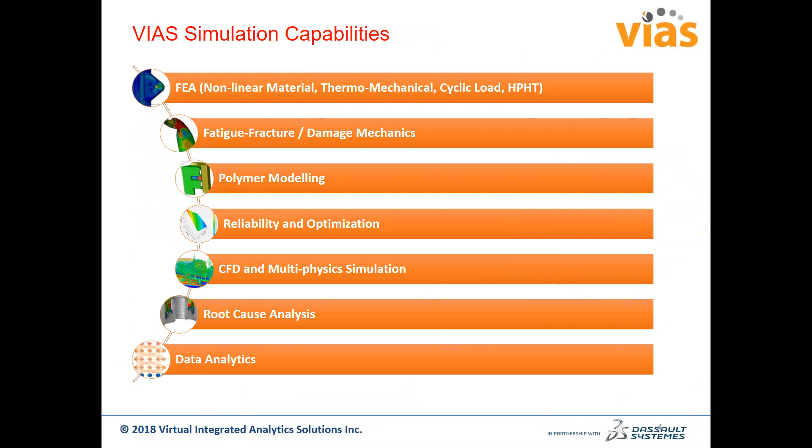Just to put into perspective a brief history and the current status of AM simulation. It's basically a process of joining materials, and I guess we can say it has been inspired by what is out there in nature. I worked on some functionally graded material during my PhD, and it was a bio-inspired material because, based on the loading requirement, we actually make a lattice structure. Our bone is basically a lattice structure which takes the load in the most efficient manner.

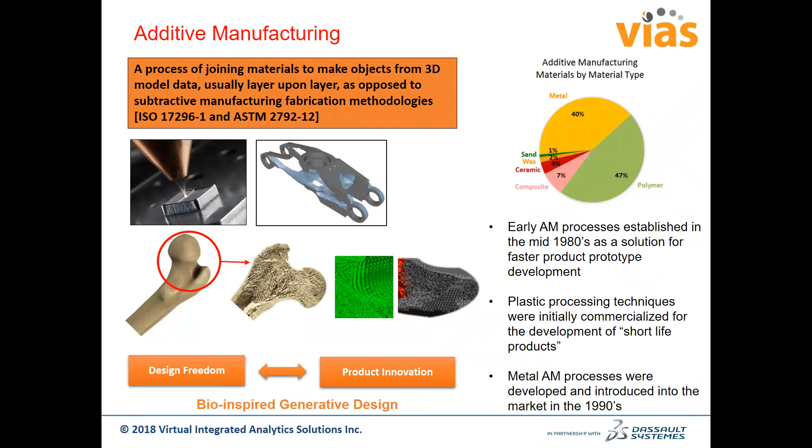Earlier, optimization was more limited by how you can manufacture it, but with additive manufacturing it's opening up to your imagination, and you can maximize your optimization algorithm to achieve a target performance. That's where additive manufacturing is coming in as a big change; it's called a disruptive technology as well. So we are looking forward to a great future with this manufacturing technique.

I'll quickly go through additive versus subtractive manufacturing. One thing is the material, so we can reduce material waste, and another is that with additive manufacturing, as I mentioned, it's about what you can optimize and how you can optimize your structure. That is becoming boundless right now.

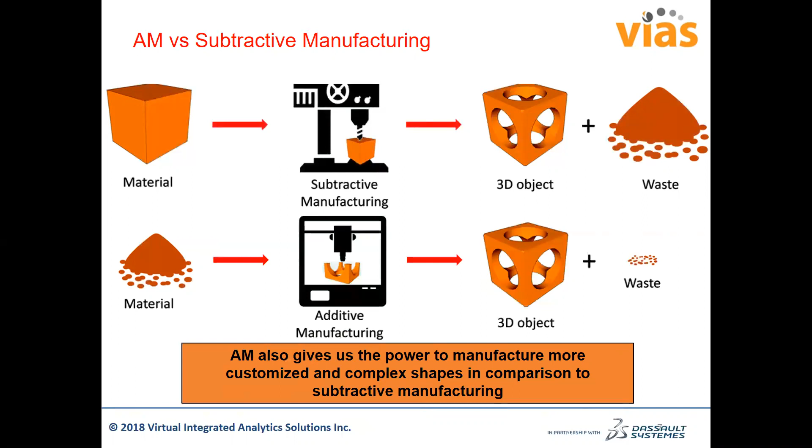Of course, there are certain challenges, and simulation is there to help you, because if we can bring the physics inside your simulation model, then one can avoid doing a lot of tests and a lot of builds with trial and error. And Dassault has a very good solution for that, which will be the topic of today's webinar; the technical part will start soon.

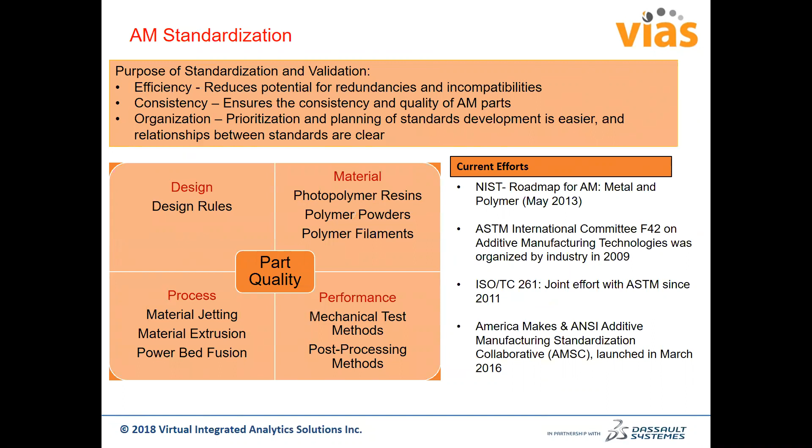There's a lot of standardization effort going on, and like any other industry, eventually there has to be strict standardization, but the Dassault Systèmes software is being developed as a more physics-based solution, and it keeps in touch with all the standardization efforts. So whatever requirements come through the standardization effort, you should be able to see them reflected in the software capabilities.

Also, one of the biggest tasks for additive manufacturing is verification and validation. Nothing in simulation can be used with fidelity without the verification and validation part. So there is a lot of verification and validation effort going on to make this software a robust and high fidelity solution. So if you have any reliability or verification and validation questions about the software, we'll be more than happy to have a conversation with you.

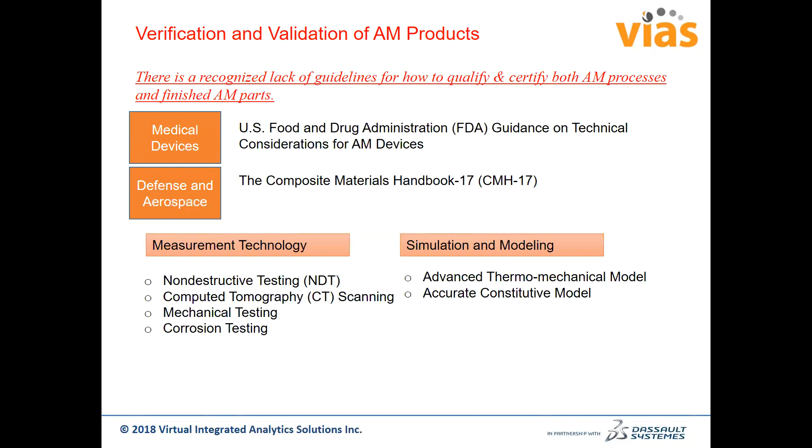Having said that, I will request Rachel to start her part of the presentation. Thank you. Okay, thank you. Can everybody hear me? Yes, we can hear you, Rachel. Okay, and you can see my screen? Yes. Okay, perfect. Thank you for the introduction.

So my name is Rachel Fu, and I work with Dassault Systèmes with the Simulia brand, so a lot of our simulation type of tools. So today I'm going to go over the Dassault Systèmes end-to-end capabilities for covering additive manufacturing. And then, as was mentioned earlier, we'll have a Q&A session at the end, so definitely bring your questions.

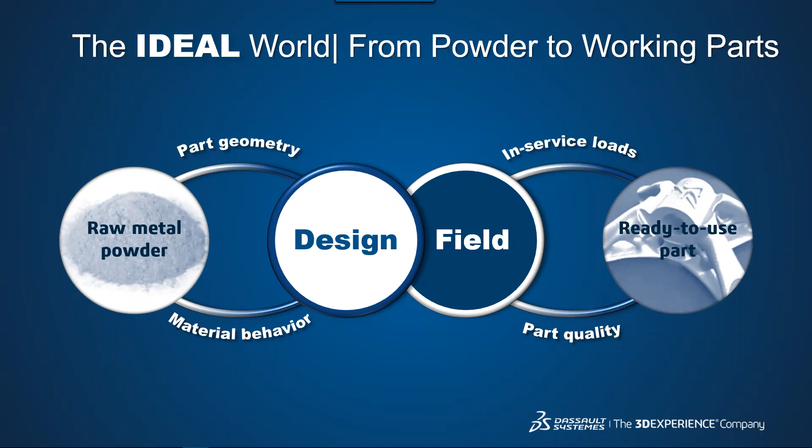Okay, so if we look at an ideal world, we typically look at the process of going from a raw metal powder to a ready-to-use part separately, and we designate challenges either to design or to how the part is actually going to perform in service. So design for additive is largely looking at things like generative design tools, topology optimization, geometry reconstruction, and functional lattices. And then on the performance side, usually the challenges are more related to accurately capturing loading and assessing things like, is there going to be crack initiation? Is the part going to withstand its fatigue life?

But when you start looking at additively manufactured parts, the additive manufacturing process introduces a lot of factors that now need to be considered when moving from your as-designed part to your as-manufactured part. So things like the support structures in your build and the tool path that you're using can largely affect your resulting part distortions, your residual stresses, your surface finish, and the as-built properties of your manufactured part.

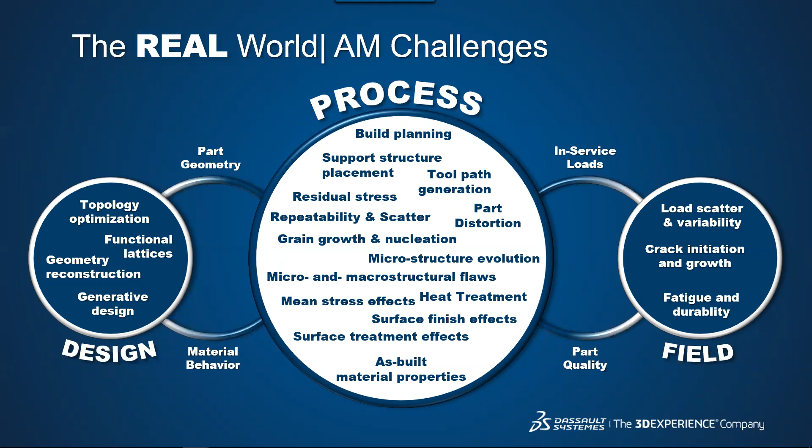So part of understanding the material properties is really looking at the microstructure evolution, grain growth, and nucleation during the build process. So we really want to use software here to help us understand this process gap between our designed part and our manufactured part. So we really need to connect all of these components.

Okay, so the current landscape of software tools for additive manufacturing is really disjointed. The designer, the manufacturing engineer, and the analyst are all working on their own files, each with their own specialized software tools. And so the challenge has become managing all the data and translating this data between all these different software tools.

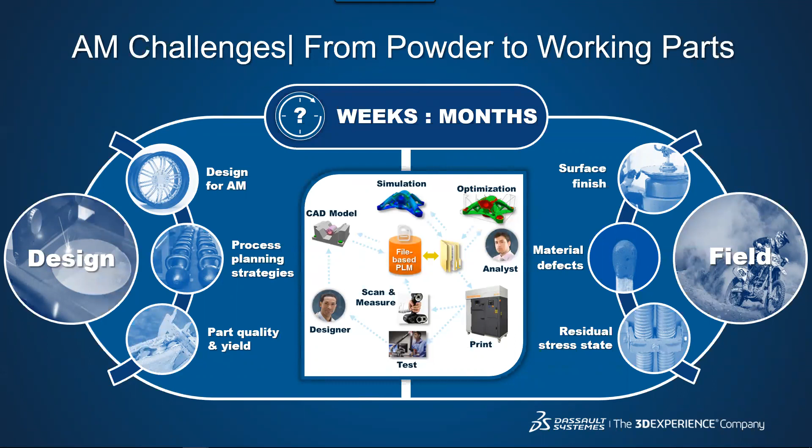So the result of this disjointed environment is that it can take weeks or months to go from a design to a successful functional part. So we're trying to think, how can we get this down more to the scale of days to weeks? So instead of taking months to come up with a design and have it be a functional build, how can we do this on the order of days or weeks?

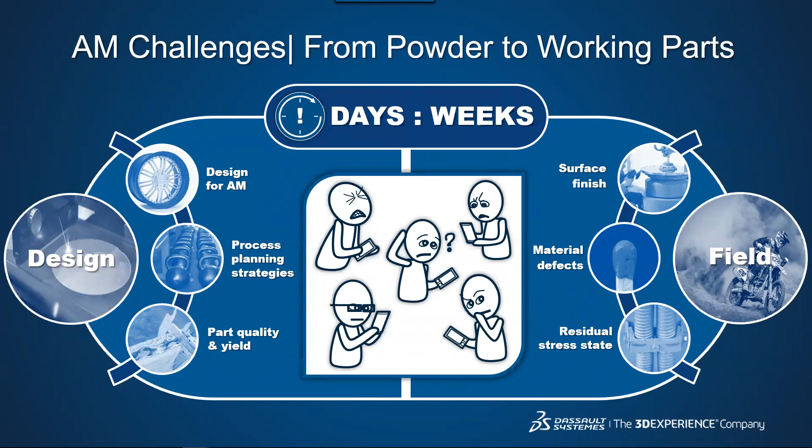So with Dassault Systèmes, the next evolution of our software capabilities is all encompassed within this 3DEXPERIENCE platform. The idea is that Dassault has lots of different technologies available: powerful CAD technologies, manufacturing technologies, simulation technologies. Can we bring this all to the same platform so that it can all use the same data, so that there is none of this time spent in translation?

And so clearly for additive manufacturing, where one of the main issues is a disjointed landscape for software, the 3D Experience platform is going to be a solution that is going to help address some of these AM challenges. So the 3D Experience platform is really data driven.

So again, all of the different capabilities within the platform are sharing the same kind of data set, but it's still model based. So your finite element analyst is still working on a model that is the same representation of data as the CAD designer, but everybody does have their own specific model. So it's not too much of a paradigm shift; engineers will still understand the way these different models or these different roles work.

What it really allows you to do is just stay connected with all of the different engineering functions on the same set of data to help you connect what's happening in the real world versus what you're virtually simulating or developing.

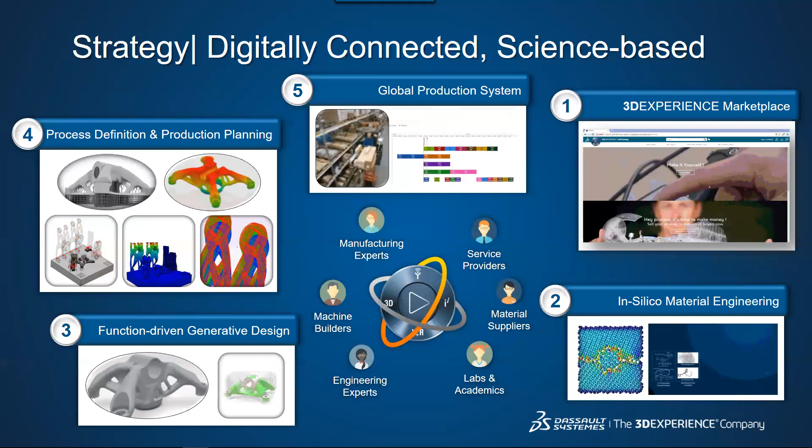The fourth bucket is process definition and production planning, and we will talk about this in detail in this webinar as well. So this bucket encompasses setting up your manufacturing build, sending it to a printer, and then also using that information to do build process simulations, which is going to help you figure out if that build is going to be successful, so that you can digitally work all of that out before you actually send any information to a printer.

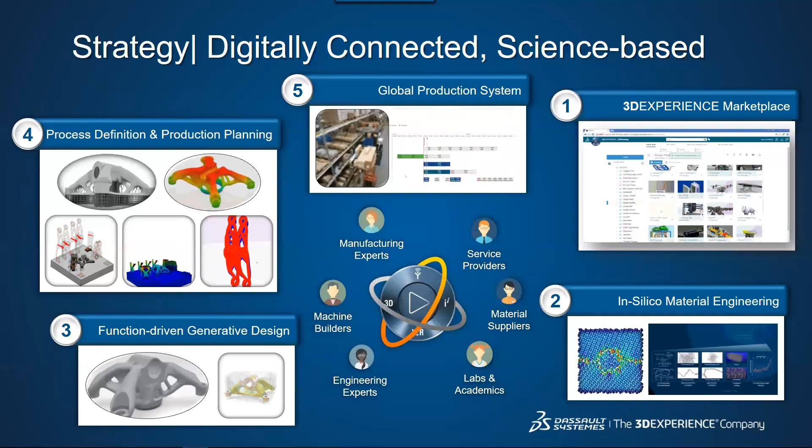And then this fifth bucket is global production system. And so Dassault has capabilities for manufacturing and monitoring your manufacturing floor. So these tools will help you make sure your additive manufacturing machines are all running optimally, you have enough materials, things like that. Just basically being able to manage your production system.

Okay, so the first role or application I want to look at is this functional generative designer role. So the tools in this application are really changing the paradigm from simply checking if your design meets requirements to using optimization tools to actually find the design that best meets the requirements. And now with advances in additive manufacturing, we can actually build these optimized organic designs.

So the main advantage of this tool is really the combination of a robust optimization solver coupled with powerful but really easy to use geometry reconstruction tools. So there's a simple workflow assistant that guides the user through setting up the design space, loading conditions, and then your optimization targets and constraints.

And then after your optimization is performed, you can explore the optimized design space. And then with a simple button click, you can actually generate CAD geometry from your optimized mesh. And then you can do your validation study on this geometry.

So the other capability that this tool has is that different manufacturing constraints can be applied to the optimization. So we see here there are milling and casting constraints, versus say additive, where maybe you don't have any manufacturing constraints. So these different manufacturing constraints, along with this variants creation tool that we have also in this application, really help you choose the best concept based on whatever your specific business key performance indicators are.

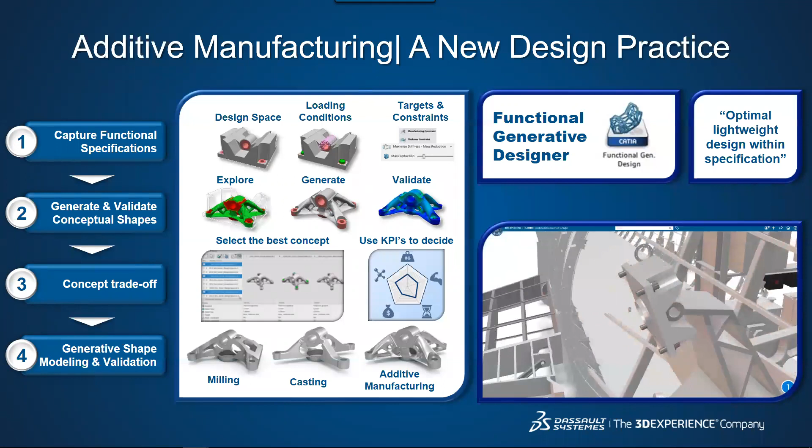So when you've gone through these exercises of these different optimizations, you've used the variants tools to decide on what your final concept is, then you can use our geometry reconstruction tools to reconstruct high quality shapes, and that really leverages the whole power of the CATIA modeling that we have within the 3D Experience platform.

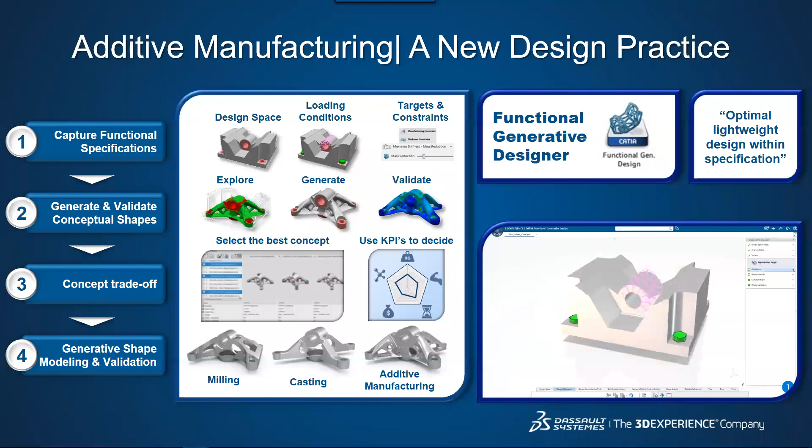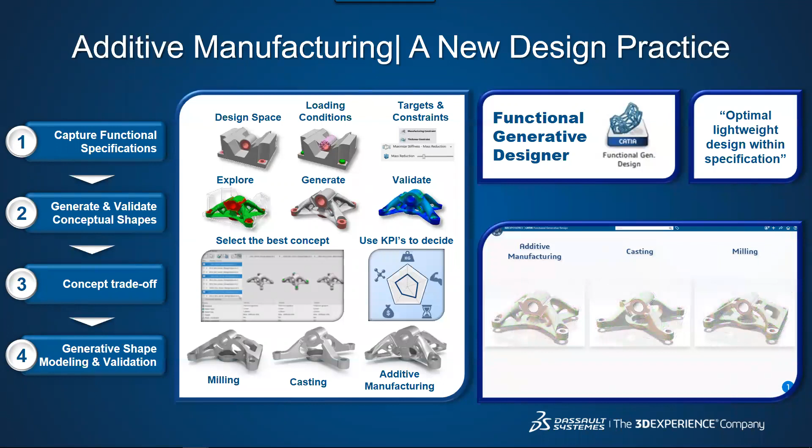So when we talk to designers and manufacturing engineers who are looking at design for AM, we've really observed that the main pain point for generating this topology optimized geometry for additive is connecting those optimized simulation results with a CAD geometry reconstruction. And so that is the process that can be handed off between a designer and a simulation expert, which can take months of work. But this role really integrates that all into the same solution, so it can really save a lot of time in that space.

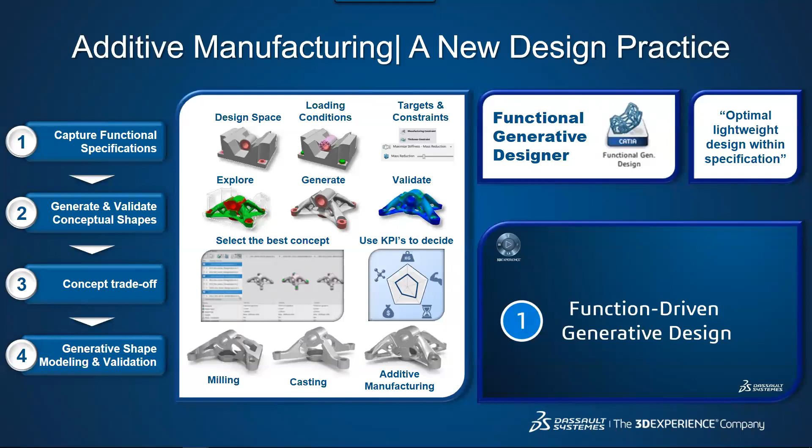So we've seen how the interface looks, and it's a very intuitive designer-based interface to allow designers to have access to these simulation tools. But if we look at the technology behind these tools, we can see that it's based on our established Tosca and Abaqus solver technologies.

So topology optimization gets increasingly more complex as you add nonlinearities in the model. So Tosca, which is a very advanced topology optimization tool, really can cover all of these complexities up to large relative motions, including friction. So currently our functional generative design tools include optimization with linearized contact, but our roadmap is to ultimately include all of these levels of complexity.

So we've also recently introduced geometry-based overhang constraints, and this is specifically for additive. So this means you can define your build direction, and it will include that in the optimization so that it can generate an optimized shape that is self-supporting or minimizes the amount of support structures required.

So this final box here on the right is showing the different levels of geometry reconstruction techniques that are available. I mentioned earlier that there's a one-button click reconstruction tool, and that's this smooth surface method shown here. Direct modeling lets you draw rough tubular shapes on a surface and then merge those tubes and also use dedicated drawing stripes. Or you can actually build in parametrized shapes, so you can dimension different regions of the model. So you have lots of different flexibilities in how you're doing your geometry reconstruction.

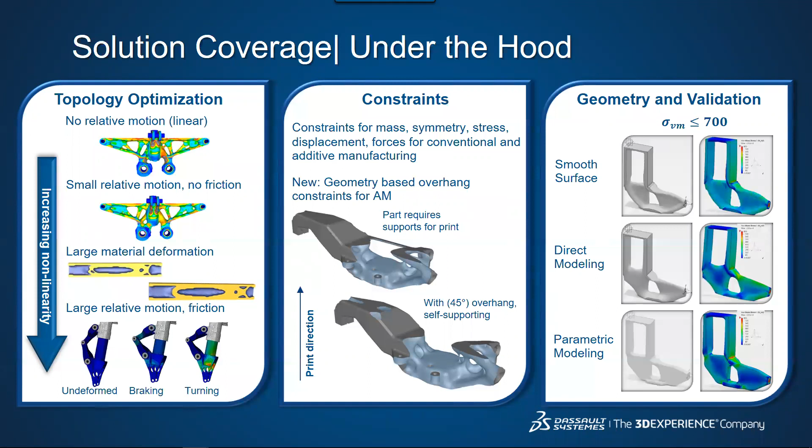Okay, the next role I want to introduce you to is where we plan for the additive manufacturing build. So currently we support out-of-the-box powder bed fusion process, and we have plans to expand to other AM processes, which I'll talk about in a future slide. So the first step here is what we call capturing the manufacturing environment with process reuse. And what this really means is that we can have a set of parameters that are specific to a given printer and material set, and then we ensure that these optimized parameters are consistently used across an organization.

The next step in here is process preparation, and this includes orienting the part properly on the build tray, generating support structures, and then nesting all of the parts that are going to be included in the build. So for part orientation, we have some geometric optimization tools, so you can do things like minimize supported area or minimize support structure volume. We can generate wire, tree, or volumetric support structures. And one important thing to note here is that these support structures are geometry-based, and this is unique in this space. So these support structure geometries can be used upstream for design modifications, but they can also be used downstream for process simulations.

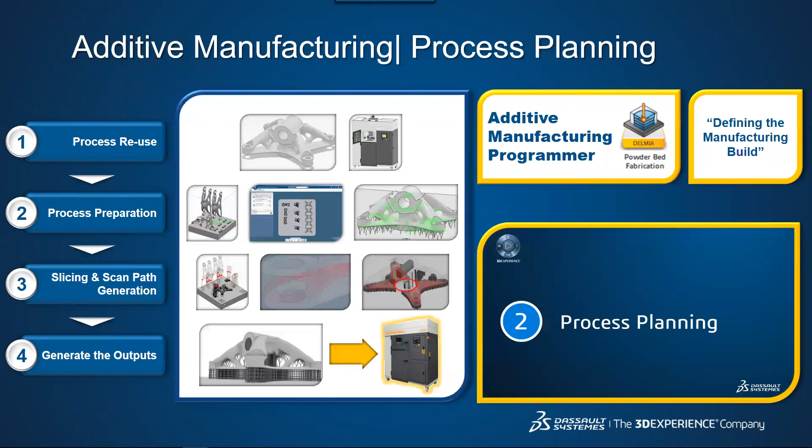So the nesting of the parts on the build tray we can do automatically according to some given rules or specified parameters. And then once all of your parts have been nested, the next step is to move to the slicing and scan paths. And those are generated based on process parameters, so things like laser power, hatch angle, scan speeds. And then once those tool paths have been generated, they can either be directly sent to the printer via some virtual machine APIs or neutral file formats, or we can use them as inputs for process simulation. And so this is the next piece that we'll see.

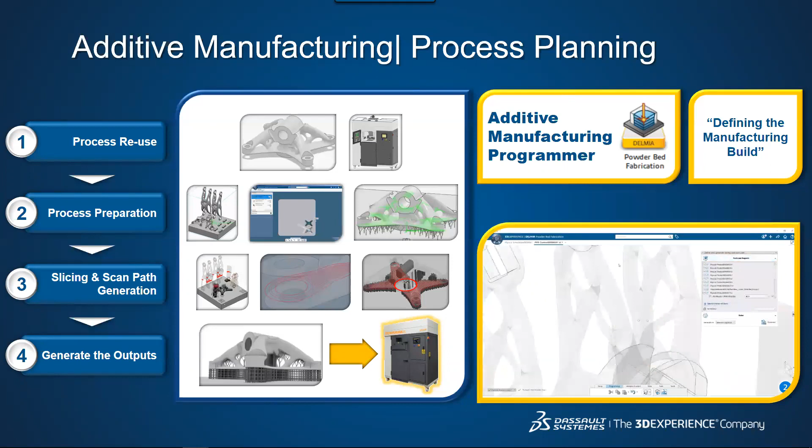Okay, so now we come to the additive manufacturing researcher role, and this is really where we're doing the process simulation or the virtual printing. And here we're really using the data from the other two applications that we've discussed to do these process simulations. So again, this is already all built on the build setup that you generated in the previous application. So we're going to focus more in depth on this application for the remainder of this webinar.

So within our process simulation application, we have a guided user interface for the powder bed process again. And this assistant really walks you through the steps required to build a process simulation model. So because we're finding designers and manufacturing engineers are also interested in additive process simulation results, we really created this guided interface to contain the simulation best practices so that it's practical for non-simulation experts as well.

So it's a simple to use interface, but underneath this graphical user interface is really a powerful general purpose simulation framework. And this has been developed on our established Abaqus solver technology. So the framework really allows us to perform multiple levels of simulation within the tool.

And we'll look at some details of that in the next slide, but really we're able to look at detailed process level simulations, so looking at things like microstructure, or we can look at what's more typically done, so part level simulations where you're looking at distortions and residual stresses for a given build part. But we can also look at build level simulations, so if you want to look at all the parts in the build tray and see if there are any thermal interactions that are occurring, we can do all three levels of simulation within the same framework.

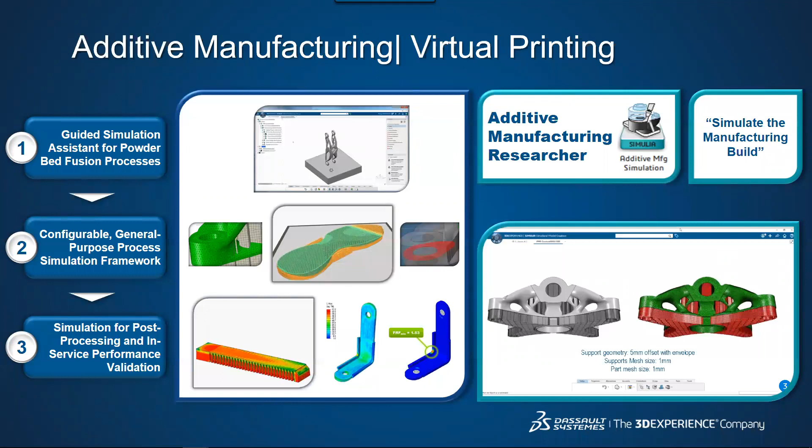Okay, so let's first take a look at this AM simulation framework. So we've developed some new technology for the solver to be able to handle these additive manufacturing type simulations. And one of the key tools in here is the mesh intersection module. So this is one of the main and very powerful features of the framework. So what this module does is it allows us to take process toolpath data. So that data is in the form of time, XYZ, and whatever specific data set, say laser power. And it intersects this process data with any arbitrary mesh.

So this means that we can use design as a starting point for simulation in that we can directly mesh our CAD geometry, and we do not need to use voxel approaches. And this is true regardless of how complex the part is. So the solver is going to handle sweeping through the finite element mesh with the toolpath and figuring out how to intersect that toolpath with the mesh to accurately represent the physics of the build.

So this process data can be directly obtained from print machines. So this could be at exact machine detail levels, and so that's, you know, millions of events, or you could use a more lumped representation if you'd like. So really, the user has control over the detail required in that toolpath data.

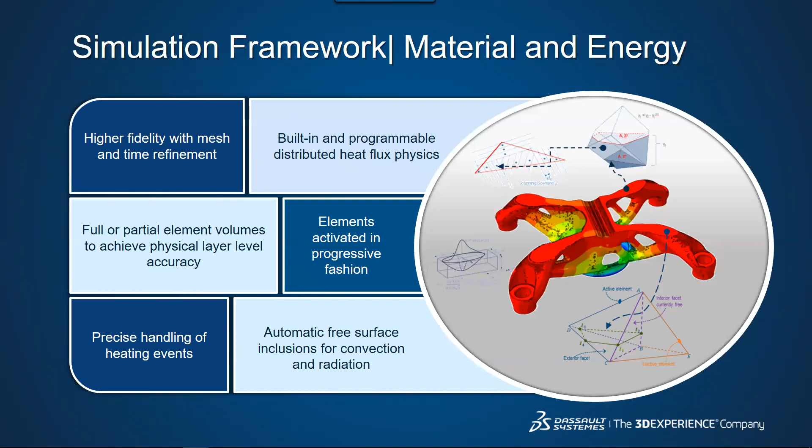Okay, so how do we do these process simulations? We perform the process simulations by doing sequential thermal stress analysis. So in the heat transfer analysis, the real scan data, or the real laser path data, is used to calculate the heat flux, including the detailed temperature dependent material properties and the build environment. So we have the build tray and the ambient conditions also accounted for. And this gives us our resulting high accuracy thermal profiles for the build.

We then use these thermal profiles to drive the stress analysis, and this is what is used to compute structural deformations and stresses. So that's the idea of how the overall simulation workflow looks. Let's look now at the value that these process simulations can provide.

So working with different customers, we found that recoater interference is an issue, and this occurs when distortions cause the build part to rise up out of the powder bed. This interference can cause defects, porosity, or it can completely kill the build. So to examine recoater interference, we can either monitor the distortions during the build on the current recoater plane and check that these values are within a given tolerance, which is what's shown in this animation here. We can also monitor those distortions during the simulation, and then terminate the simulation once a failure tolerance is reached.

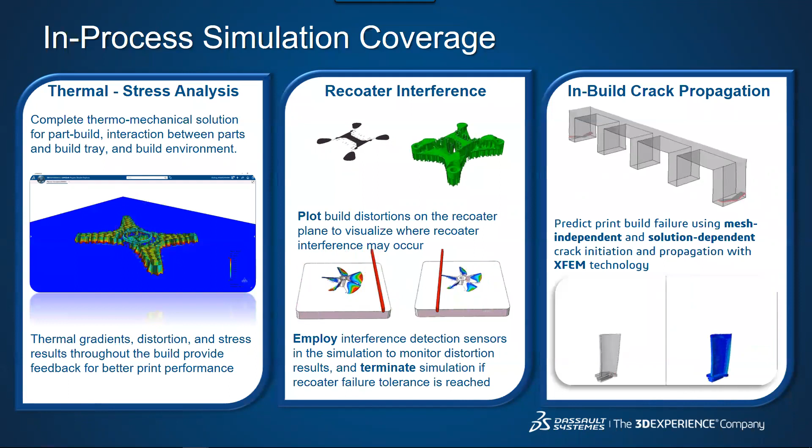So we've characterized the levels of solution fidelity as design through production to analysis, where design is a fast solution, which is just required in aiding design decisions, whereas analysis is a refined type of simulation where we have one build layer per time increment.

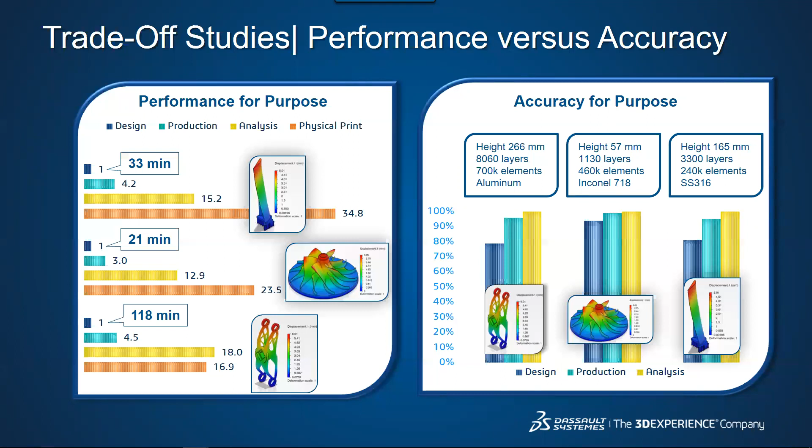Okay, so after the additive manufacturing build simulation, often you also need to simulate the additional post-processing that's done to the part. So it's not just built in its life cycle, it's going to go through a lot of post-processing treatments as well. So typically, wire EDM is going to be used to remove the part from the build plate. And then there's also going to be heat treatment cycles or any other final NC machining type processes.

So we can use progressive element removal to simulate wire EDM. And then we can also apply heat treatment thermal cycling to simulate that reduction of build stresses. And then we can include the distortions of the final build part in our NC machining code, and this can help you with fixture design and your NC machining programming.

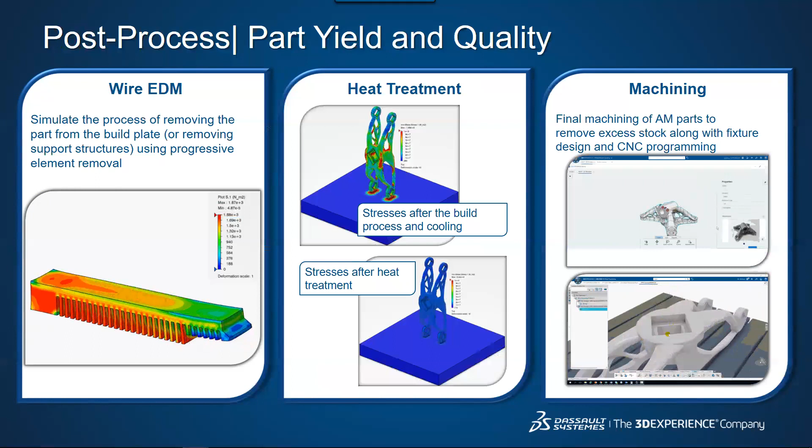Okay, so I mentioned earlier that one of the strengths of our solution is that the process simulations are built upon our comprehensive nonlinear finite element solver. So as a result of that, we are also able to do in-service loading of the additively manufactured part, because we can import the residual stress effects from the manufacturing history into our service loading simulation. So part failure and part durability are largely affected by these residual stresses from the manufacturing. So the ability to incorporate them into our subsequent in-service loading type simulations is really important.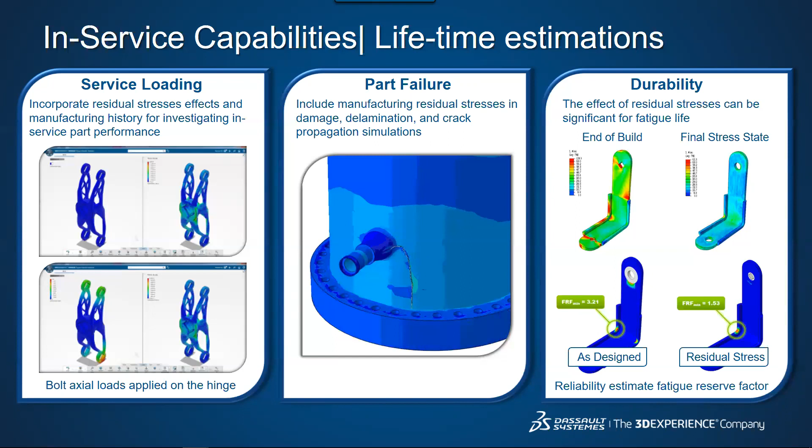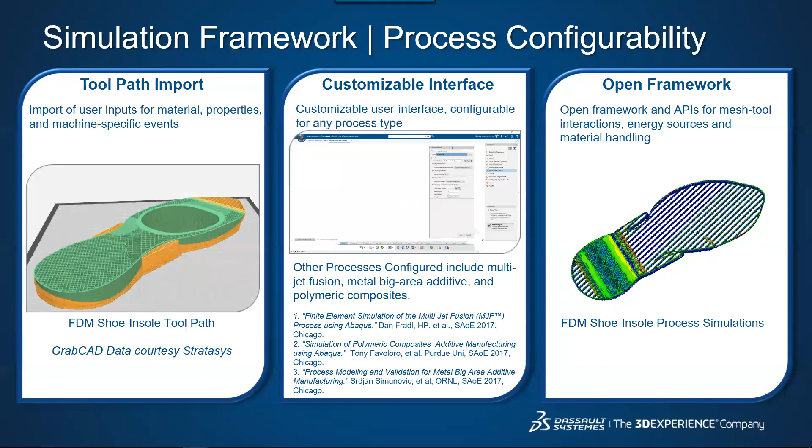Okay, so although our out-of-the-box tools currently support powder bed fusion, the simulation framework is highly configurable. So we've been able to use the same framework for different types of additive processes, things like FDM, multi-jet fusion, or big area additive manufacturing, which is some work we've done with Oak Ridge.

Okay, so far we've reviewed 3 roles in our additive manufacturing solution. We've looked at functional generative design, manufacturing planning, and process simulations. So the final role I want to show you is the reverse shape optimizer, and this is used for shape compensation. So this is an established technology, but we're finding that the capabilities are providing a lot of value, specifically in the AM space. So effectively, all this tool does is allow us to morph a CAD object by using point cloud data.

So there's a couple of different ways we can use this. We have our process simulation distortion results, so we can morph our original CAD object based on those process simulation distortion results. And that gives us a CAD representation of the predicted final build part. So we can do deviation analysis to compare this with experimentally obtained measurements. The other more interesting way we can use this tool is by negatively compensating the CAD part. So, we have these predicted build distortions.

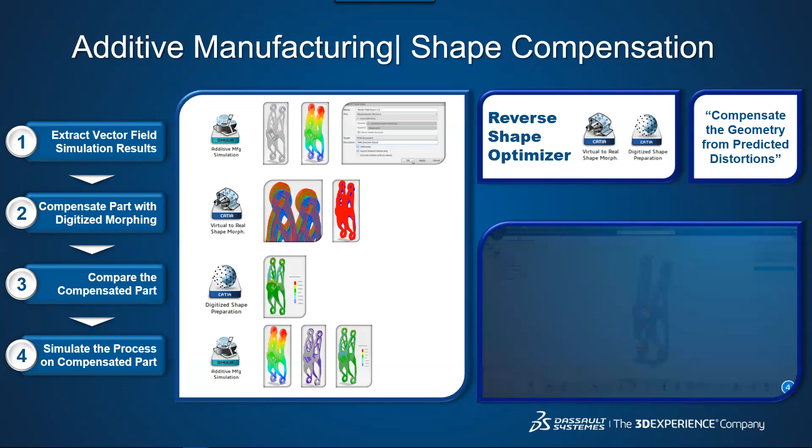We can compensate the CAD part based on a negative scaling of those distortions. So then when you actually build that negatively compensated part, as it distorts during the build, it actually gets closer to your as-designed geometry instead of further away. Because this is a nonlinear process, you may have to do this iteration loop a couple of times, but we have this set of tools that allows you to do that.

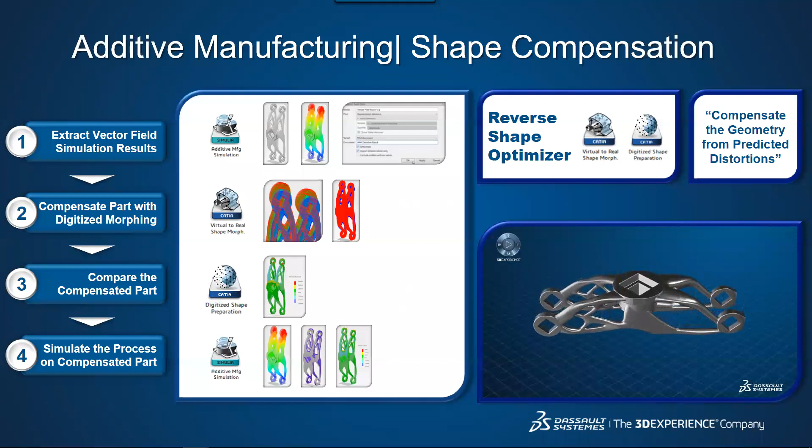And so you can actually virtually work out a geometry that when printed will result in your as-designed part. So you don't need to do build iterations to see what those distortions are. You can do all of that through simulation and compensation.

Okay, so next we move into materials coverage. Dassault has solutions to cover multi-scale material modeling, and this is important especially for additive manufacturing because all scales happen during additive manufacturing. So before the print, we have phase field simulations, and this is where the user can study the effect of various alloy additive content on the phase transformation and grain morphology.

So you can look at different temperature gradients and different cooling rates and see what the resulting phase transformations are. And you could do this for a variety of materials. And so Dassault again has tools within our Biovia brand for doing these types of simulations.

If we look in the middle box, during the print, we have solutions to capture material property evolution. So we can monitor the cooling rates in these thermal analyses for our build process. And by monitoring those cooling rates, we can predict the metallurgic transformations that are going to occur, which will give us phase content, grain nucleation, and porosity. And then once we have these microstructure results, we can translate that to as-built macroscale material properties of the part.

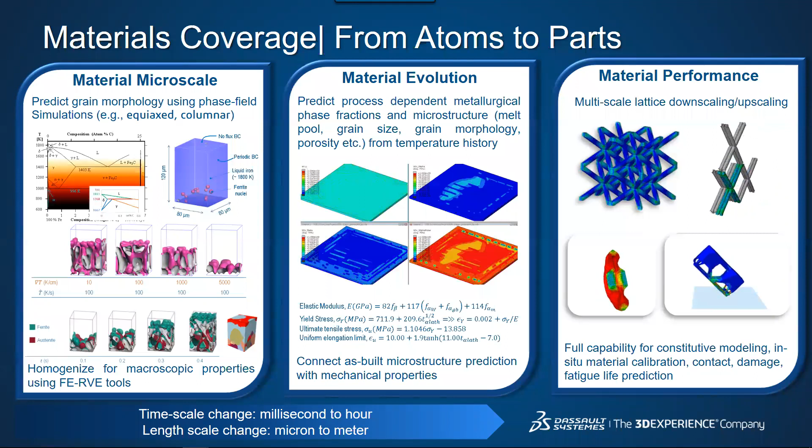Okay, so we have all of these nice tools, and then the question is always, is this simulation capability really predictive? So we've done a lot of validation efforts looking at temperatures, distortions, residual stresses, and microstructure for a lot of different processes and materials. We start with coupon level deformations, and here we can show that we worked with Renishaw on using different scan patterns and matching distortions for these simple bridge geometries.

And then we can also just use material properties from literature to blindly match various experimental results. This is because it's a full thermomechanical solution, so we don't need any calibration. We can use typical material properties to match experimental results. And then we've done some slightly more complex geometry distortion result comparisons.

So after we've looked at this coupon level of deformations, we move to build part level deformations. This box on the right is showing the work we've done with Oak Ridge and their big area additive manufacturing, where we start with a thin walled structure to look at predicted distortions and make sure we have the right heat transfer coefficients. And then we can move to looking at things like this full-size backhoe, which takes a week to build and 6 hours to simulate. So there's some clear value there in having validated simulation capabilities.

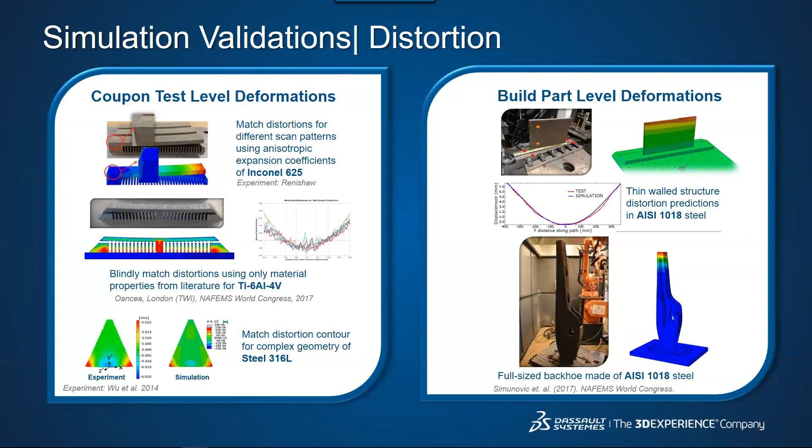We're also the first process simulation software to validate residual stresses that are induced by the AM process. We've compared this with experimental residual stress results reported in literature for this L-shaped column for stainless steel.

And then we've also shown that we can look at microstructure predictions. With melt pool evolution predictions, we've been able to look at melt pool size and overlap due to interaction between the laser beam and unfused powder. And we again compared that with experimental results in literature.

And then we have also validated location-specific microstructural features, such as grain size, morphology characteristics, and phase fractions for titanium. This was done with TWI. We were able to accurately predict phase contents compared with what TWI found in experiments for titanium 64. And we also found that we could predict porosity from unfused regions along the boundaries of these columns that they were investigating.

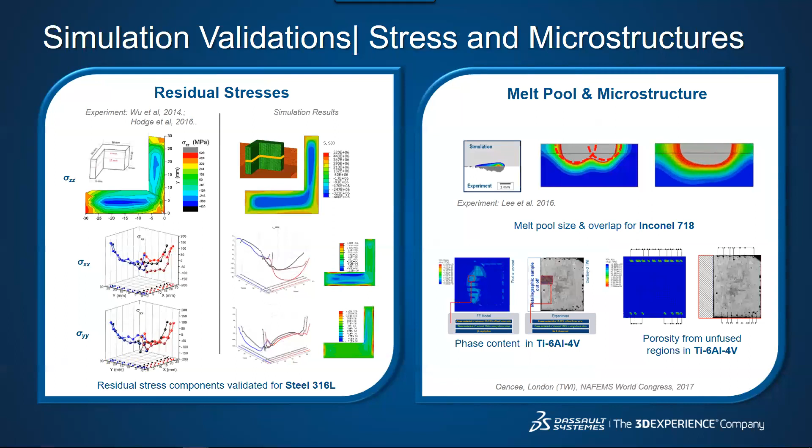And so that validation work was done and is available also to share. So really, we have done a lot of validation efforts on a lot of different processes: SLM, LDD, FDM, MJF. We've looked at physics, starting with the basics from just temperatures all the way through to microstructure. And we have a lot of validation exercises for various materials. These are all compiled here, and we can share this as necessary, so just let us know if something is of interest.

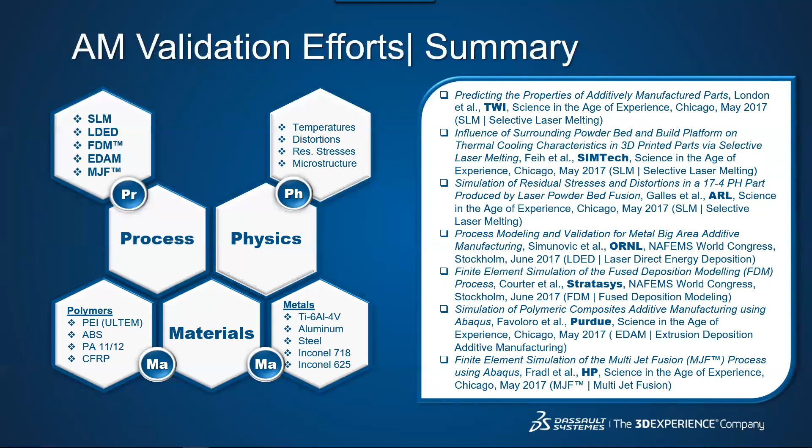And then what do we do now that we have validated process simulation? Well, we can move towards things like process parameter analytics, where we want to tweak our process parameters to, say, minimize distortions. We can do that with validated simulations.

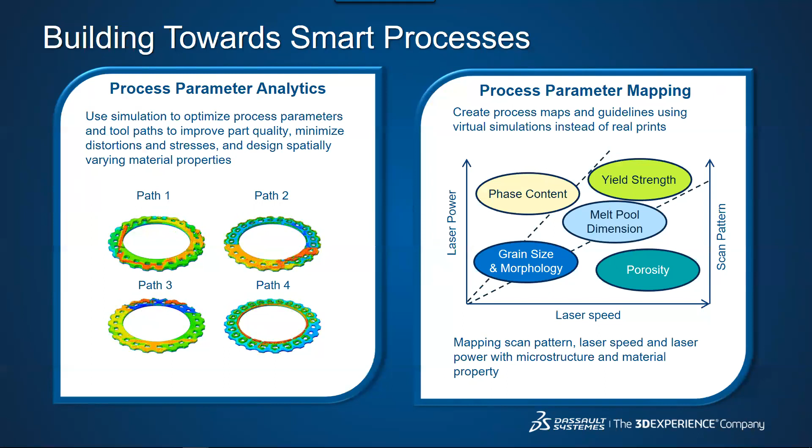And one of the other goals in the industry is also this process parameter mapping. So we can use simulation to figure out, for this set of process parameters, what do we expect the resulting part to be, so that you're not running simulations every time. You just have a map that shows you what your parameters should look like for a given material set and printer.

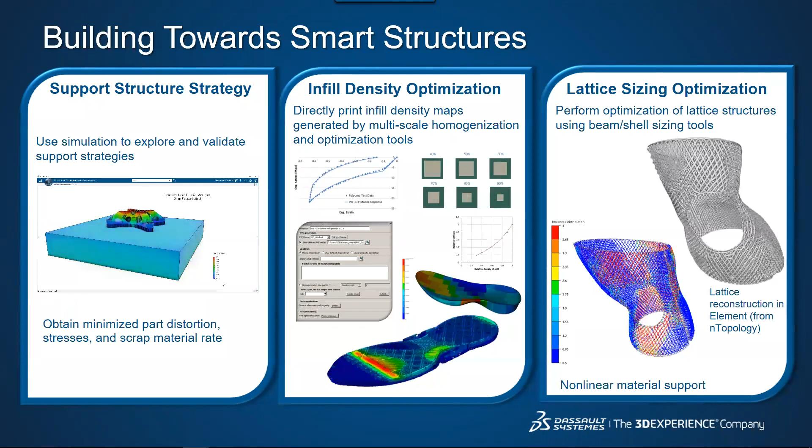And then the other way we can use validated simulations is looking at things like optimizing support structures. Because we have this integrated workflow of support structure generation right through to simulation, it's really easy to vary those support structures and see what is going to minimize distortions, be best for heat transfer, things like that. And then we also have various infill density optimization workflows and lattice sizing optimization workflows. So again, if any of these are of interest, we can discuss them in more detail.

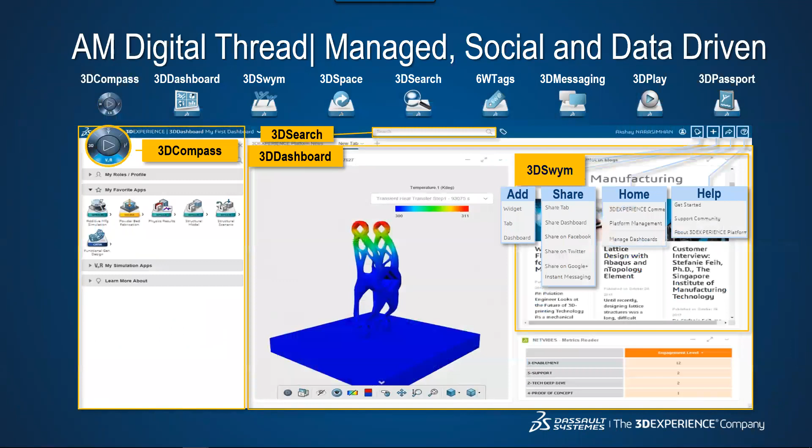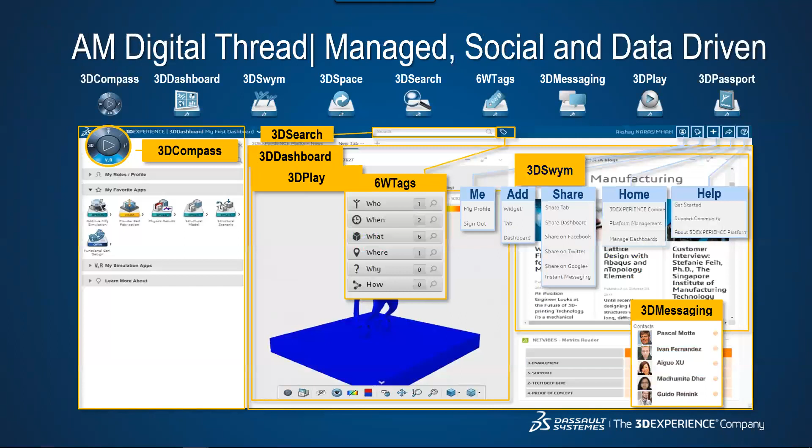So the 3DEXPERIENCE platform has a lot of different tools for collaboration and file management, and this is where all of these applications that we've discussed reside. And so we're really working on bringing all of these tools together in the additive space on the 3DEXPERIENCE platform. The platform is available on-premise and on cloud. Obviously the advantage of cloud is that there's no hardware investment required. We also have flexible burst licensing, which can be useful if your simulation workload is really variable. But on-premise is also available if you need to keep the data siloed.

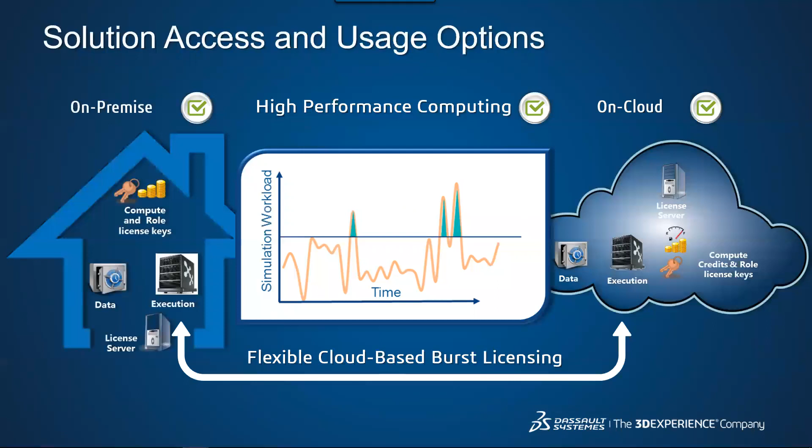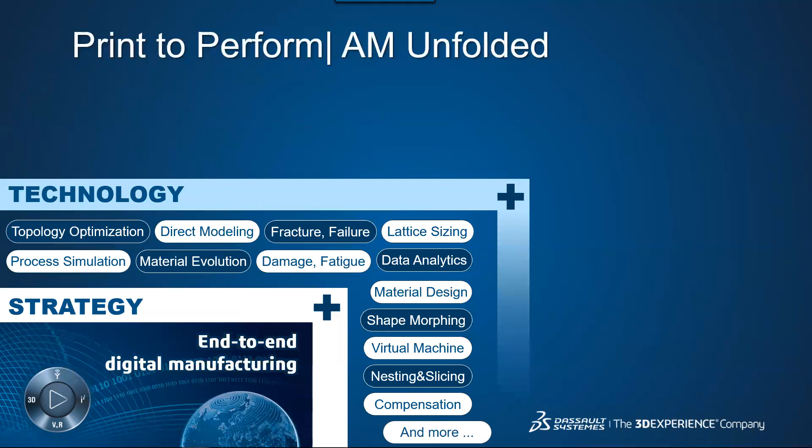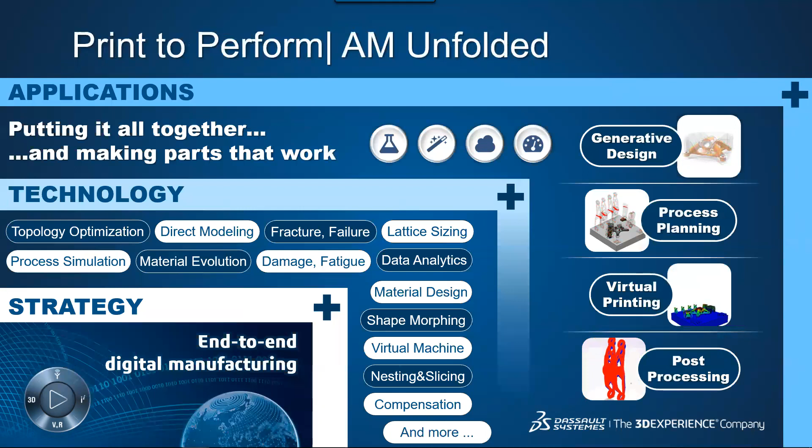Okay, so we've talked about how the landscape is very disjointed for additive manufacturing software. Dassault's strategy is this end-to-end digital manufacturing because we really have a lot of this technology. We have topology optimization solvers, fracture and failure capabilities, shape morphing tools, virtual machines. So we just need to put all of that technology together into these different applications which I've described. Everything is within the same data set, which helps engineers not having to translate data. So our goal is that within this unified platform, it's going to take you much less time, maybe on the order of days to weeks, to get from a design to a part that's working in the field.

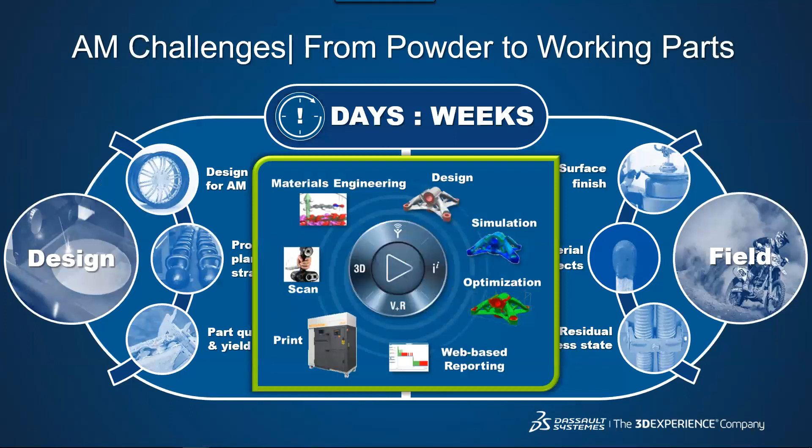So all the material that I've presented today is our 2017 version of the software. We have some updates that have recently become available in 2018. And we actually have an upcoming SIMULIA e-seminar on May 17th talking about the enhancements to the different tools that I have just explained in this webinar.

So we have some advancements in our functional generative design, things like assembly level optimization. We have some new manufacturing constraints and some new thermal conditions that can be applied. We will have some new additive manufacturing planning roles. So we'll have a powder bed programmer role, which will include some simulation capabilities built into the manufacturing planning. And then we also have roles for direct energy deposition and material extrusion coming. On the simulation side, we will have an eigenstrain method that's new, and we'll look at how that can be used for different support optimizations. And then we also have some new heat treatment work to show.